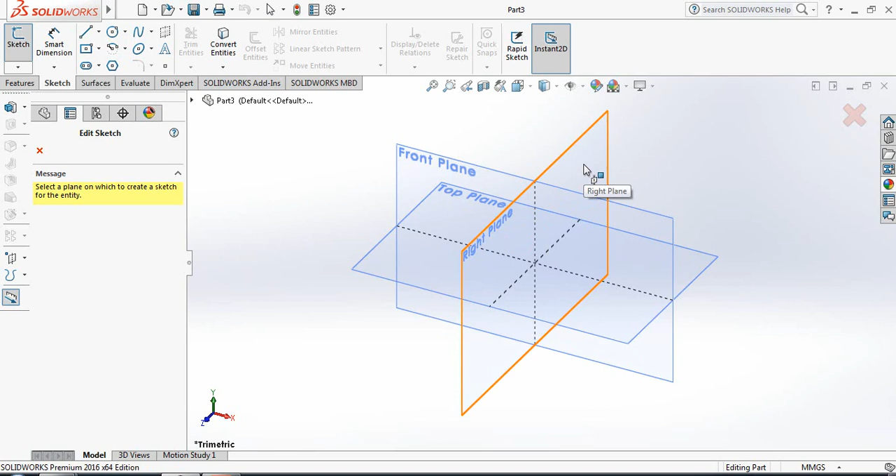So let's begin. First click here, double click on part, and from here go to sketch and click on sketch again, and from the three planes select right plane. Now select polygon, and from here select side 6.

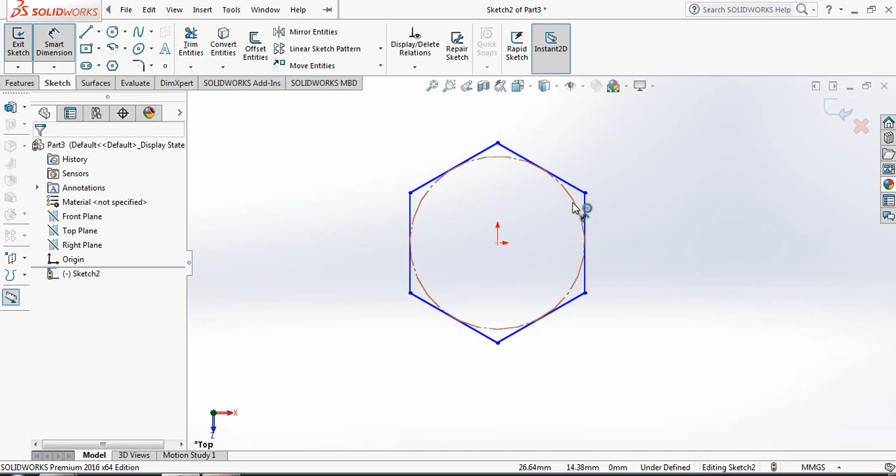Now go to smart dimension and take the dimension of this circle as 14 mm. Now go to features, click on extruded boss or base.

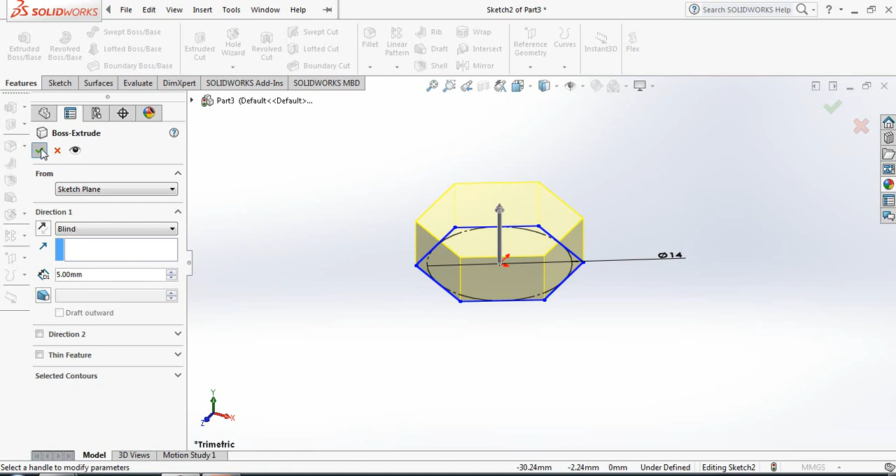Now take this one 5 mm height. Click here, click on spacebar and click here. Now go to sketch again, select the circle and draw a circle, taking radius up to this line.

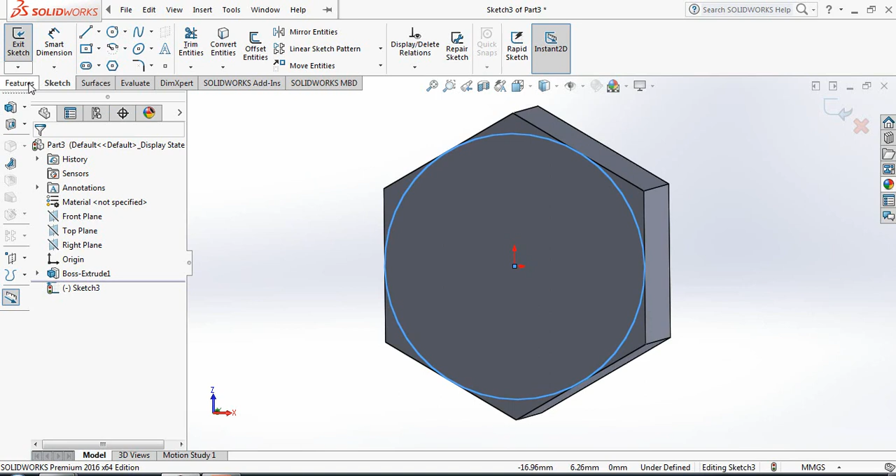Now go to features, click here. Now click on extruded cut.

Let's go back. Click here, click on spacebar, click here. Now select a circle and draw a circle.

Now go to features, click on extruded cut, and just click here to flip side to cut.

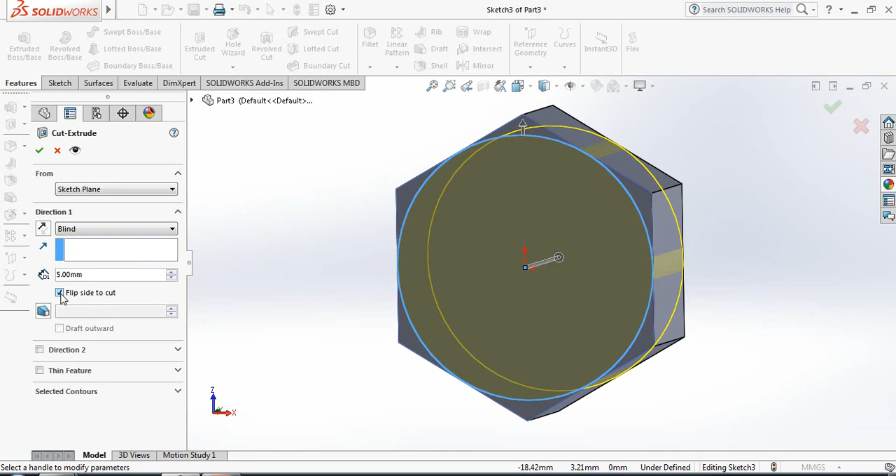Now select here and this one, take the radius 60. Click on OK. That's the taper size.

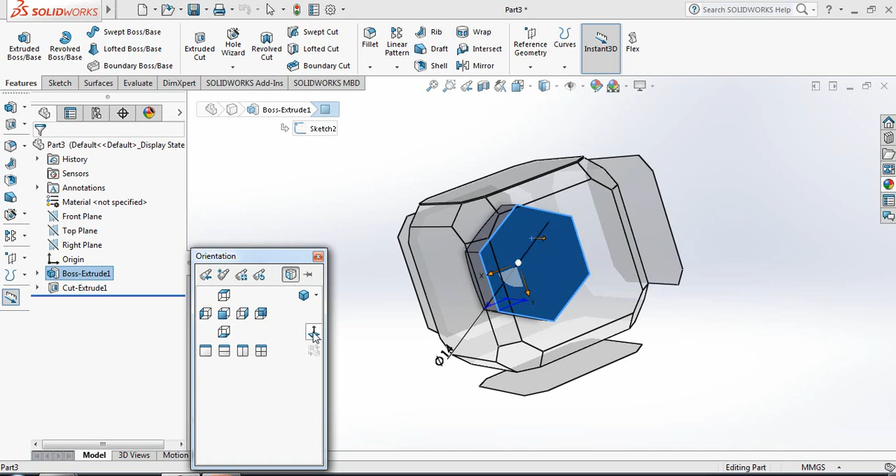Now click here, click on spacebar and click here. Now go to sketch, select circle and draw a circle here. Put a smart dimension and take the diameter as just 8 mm.

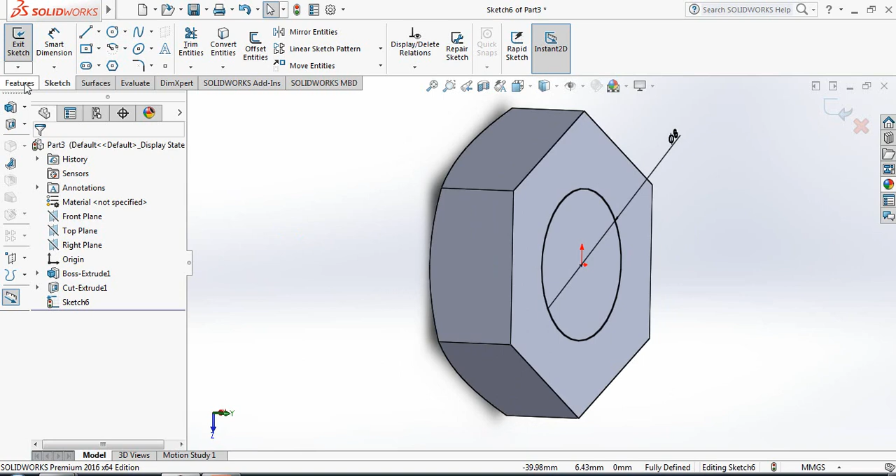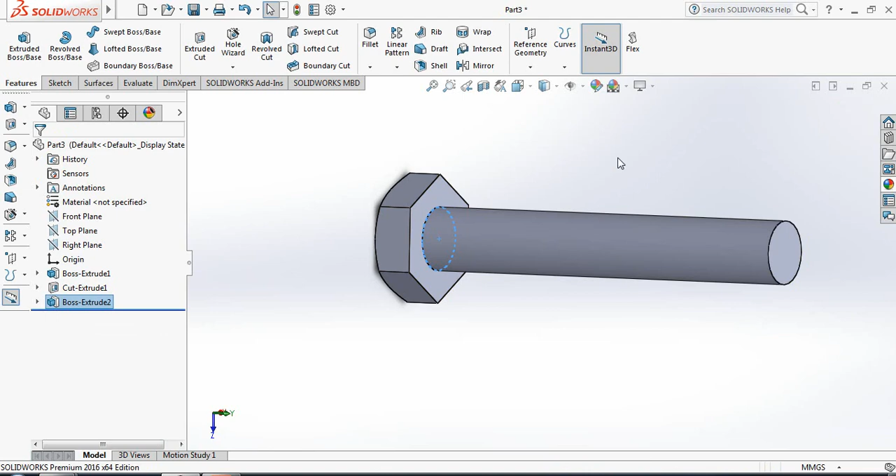Now go to features, select extruded boss or base and take this one 50 mm. Click here, click on spacebar and click here.

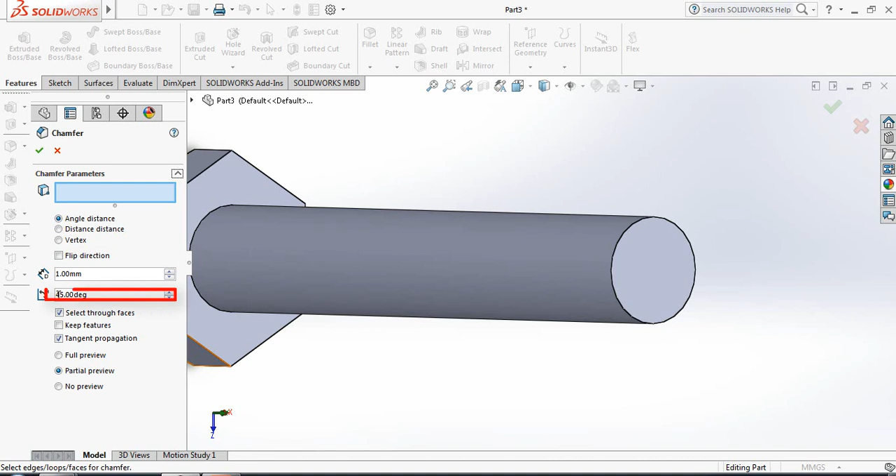Now go to sketch, select circle and draw a circle. Not circle, you don't need circle, we can use another formula. Now go to features, click here, select chamfer and from here select one, select this value 45 angle, and click here.

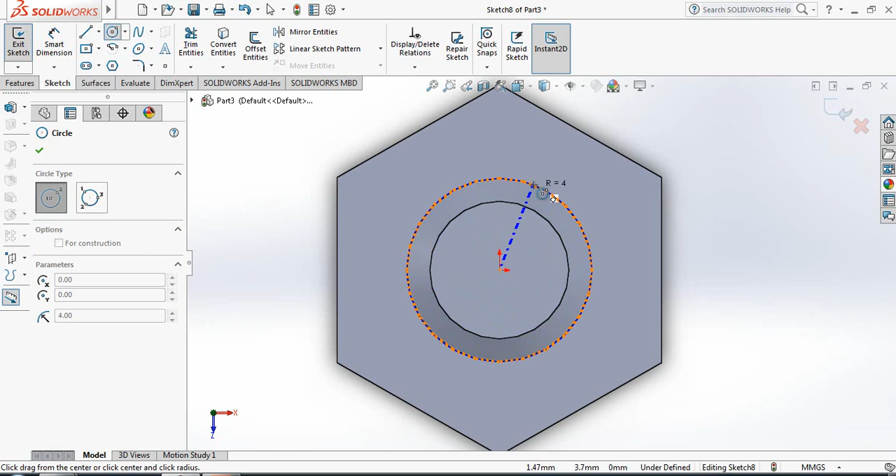Now click here, click on spacebar and click here. Now go to sketch, select circle and draw a circle up to this line.

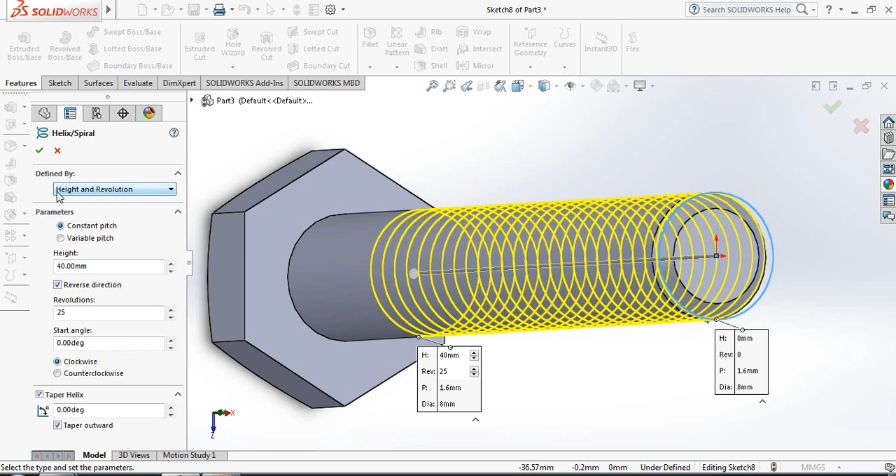Now go to features, from here select helix and spiral, and take the height 40 mm, revolution 25, and starting angle 0, and from here select height and revolution.

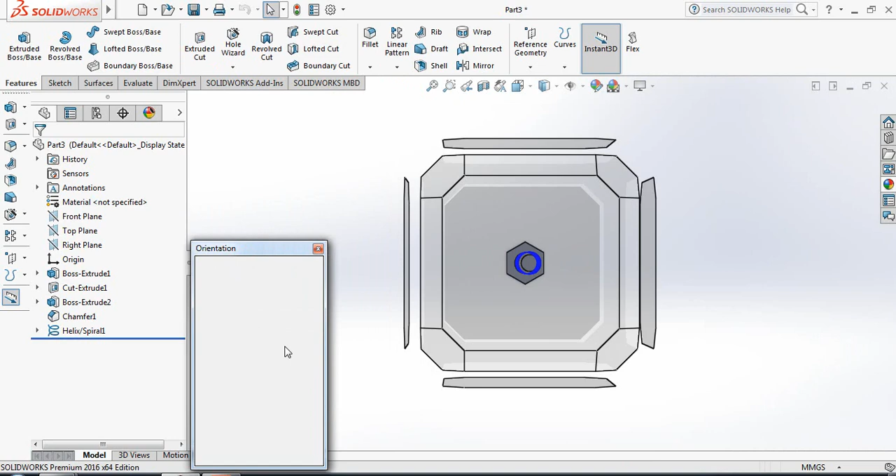Now select top plane, click on spacebar and click here. Okay, not top plane. Select front plane, click here, click on spacebar. Okay, not front, to change the plane actually. Right plane, click here, click on spacebar and click here.

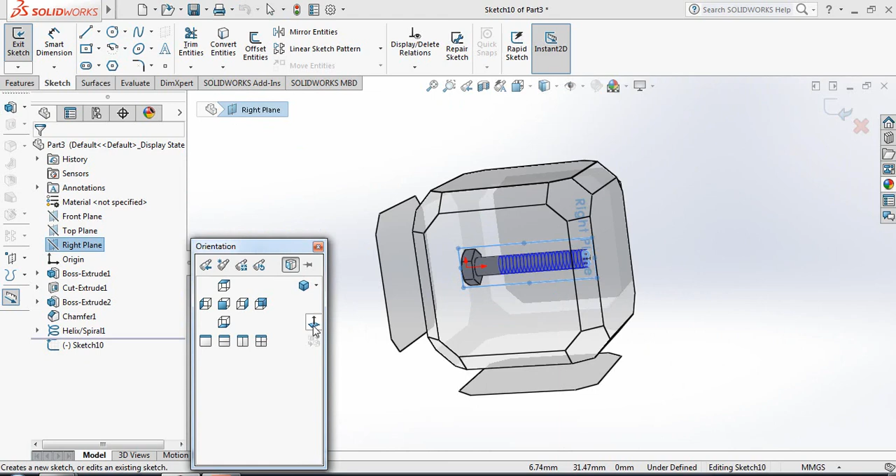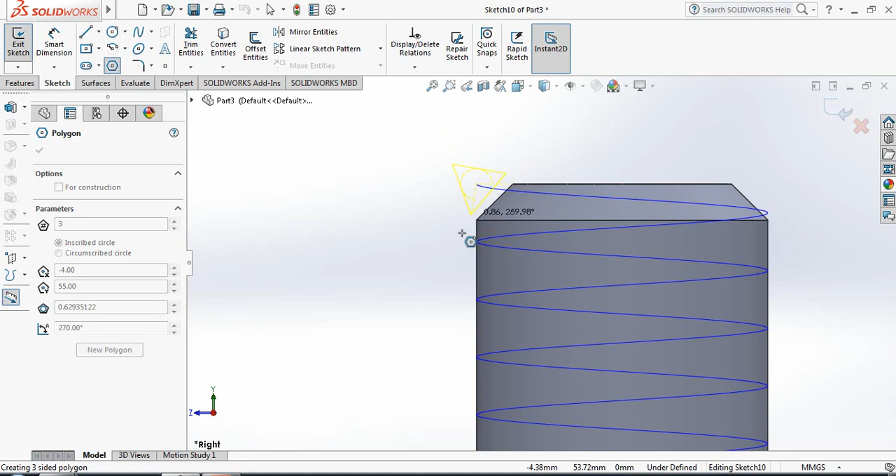Now select polygon, select side 3, and this angle select 270. Now at this point, select a polygon.

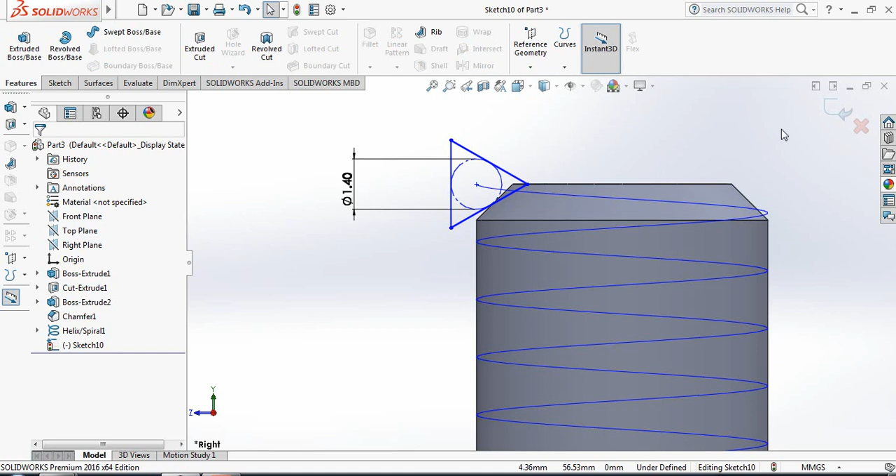Now smart dimension and take this diameter as 1.4. Now go to features, click here. Now select swept cut, and select this one.

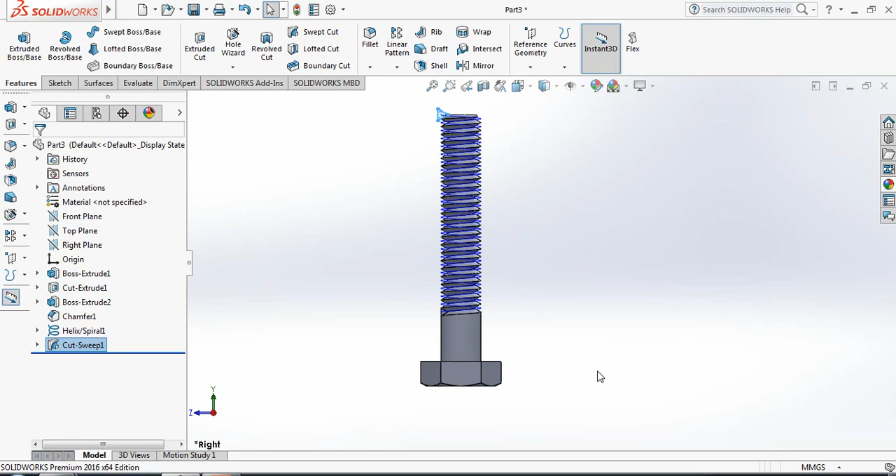So you can see that our bolt is ready. Now hide this one.

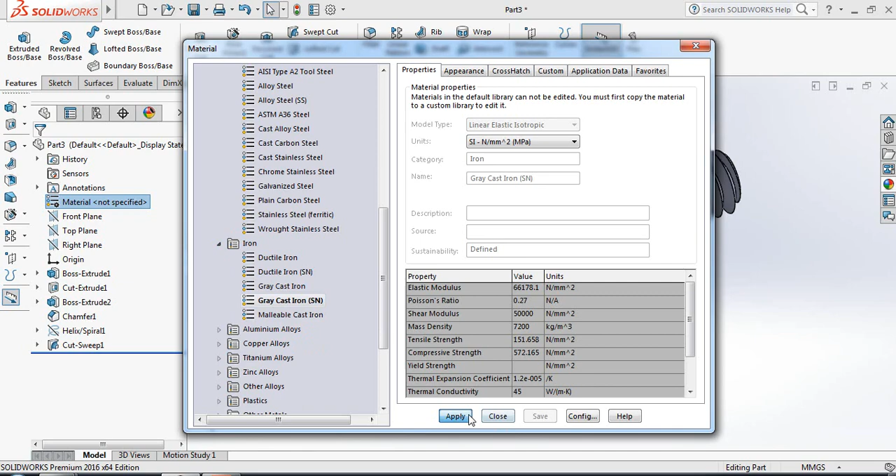So now we can say that our bolt is ready.